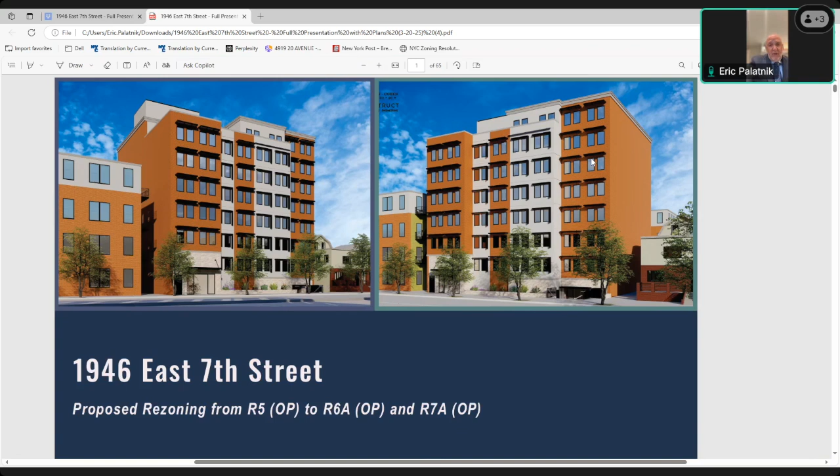Thank you very much. My name is Eric Palatnik, and I'm proud to be here today on behalf of Ahiezer Organization, which is presenting to you the proposal which is on the screen right now at 1946 East 7th Street, which is a proposed rezoning from R5 to an R6A, which is on the portion of the property you see right now, and the remainder of the block to be rezoned to an R7A. The request also seeks to remove the property from the Ocean Parkway subdistrict.

Project overview is provided here and gives you a fairly good description of what we're doing. On the left-hand side of the screen, at the lower left, you can see an image of 4-story brick multiple dwellings that were constructed in the 1920s, approximately 100 years ago. You see 2 sets of them, and then you see a single-family home.

The proposal in front of you that we're requesting to rezone, the area we seek to rezone, includes the brick buildings only. And the buildings that we seek to redevelop are the 2 brick buildings you see in the foreground, not the one in the rear. The home to the right is not included in the proposed rezoning.

The boundaries of the proposed rezoning are shown in the middle screen, shown with dots around it. The area in red is the area of the buildings that are going to be rezoned to R6A if the application is successful. And then we would construct the building that you see on the right.

This is described at the top there as a 7-story, 73-foot tall community facility and residential building, the most important part of which is providing fully affordable senior housing, 53 dwelling units, all of which will be 1-bedrooms, permanently affordable for seniors only at a 50% AMI. This building would be the continuation of an existing senior housing development that exists at the block.

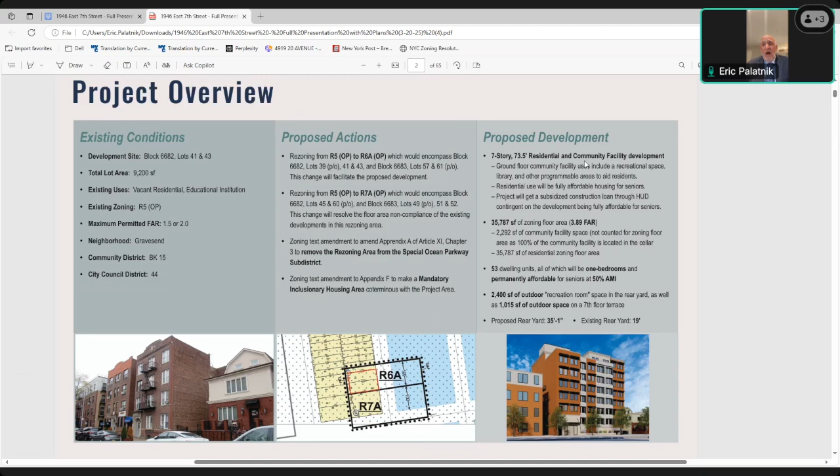It's being built fully with government money, taxpayer money, funded to fulfill a well-known, well-recognized need. There is no new senior affordable housing being built in this part of Brooklyn right now. So that's the request we have in front of you. Now this is the proposed request in a zoning map format. The left-hand side of the screen shows the existing zoning, and you see the dots in the middle.

It's an R5 OP district. We're asking to put in an R6A/R7A district - R6A on one portion, R7A on the second portion. We're not after the R7A portion of the zoning, that's not why we're here. We provided the R7A as a rationale for the zoning application that we make before you today.

There can be recommendations made to this application by the people reviewing it as we move ahead. If somebody should desire that the R7A be modified in any way, shape, or form, I don't think you'd find too much protest from the applicant, Ahiezer organization. But the R6A is the area that would enable the development of the 53 fully affordable senior units, which is why we're here today.

I'll show you pictures in a few minutes that show you that even though the map to the left shows an R5 district, there are buildings in this district that don't necessarily represent an R5 district.

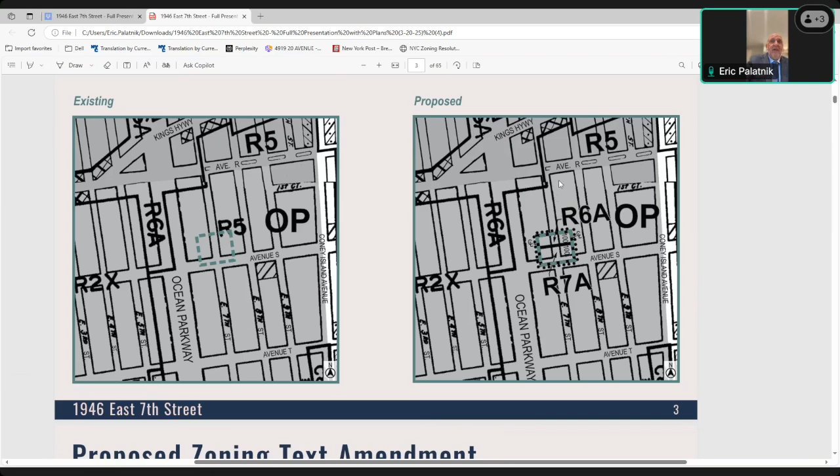Next slide I'll show you will be the Ocean Parkway sub-district. That's what we're seeking to remove the property from, the Special Ocean Parkway sub-district. The Special Ocean Parkway sub-district limits community facility developments and developments such as this specifically to a 1.5 FAR.

It was created, I believe, in the 70s - I could be off in my years - due to what people felt was a proliferation of community facility developments along Ocean Parkway and in the area, and people wanted to make sure that didn't continue. Well, that was in the 60s, or the 70s, or the 80s - I'm not quite sure which decade it was enacted in.

And now all those people are the very same people that probably live in the building to the left of us and are now well into their octogenarian years. The population has shifted in such a way, and the neighborhood has been so successful, and people have lived there their whole lives, and now they've aged, and there needs to be somewhere for them to live in the community so they can stay with their families and practice their religion and operate amongst people they grew up with.

And that is the idea of the congregation that's behind us - it's the idea of the congregation sponsoring the application. Although the senior housing will be available to people of all faiths, religions, colors, in full compliance with the Fair Housing Act.

Next slide shows you the different zoning designations. I think we know them, so I'll skip through so you don't waste your time. This shows you how the project has progressed through the years.

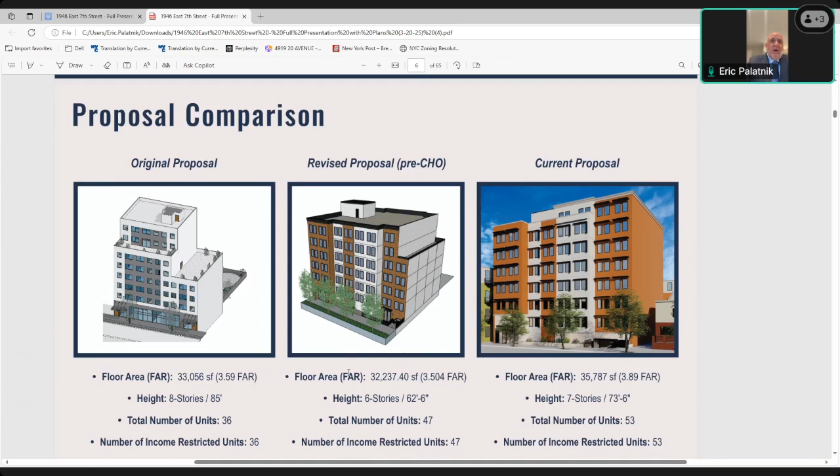While it's been undergoing review, its original proposal is shown on the left-hand side - that was an 8-story building. The 8-story building met with objection from the community. We met with the community and brought the building down, before City of Yes, to 6 stories. To be honest, we probably should have left it there at 6 stories.

But we're in a rezoning application - that's not our choice of what we leave it at. We're asking for zoning, and we have to depict to you what is allowed under the zoning. On the right-hand side shows you what's allowed under the zoning. City of Yes changed it from a 6-story building to a 7-story building and allowed us to achieve more FAR.

We've designed the building in such a way, as we started to do in the middle proposal, which was what was done in response when we were having some discussions with the community.

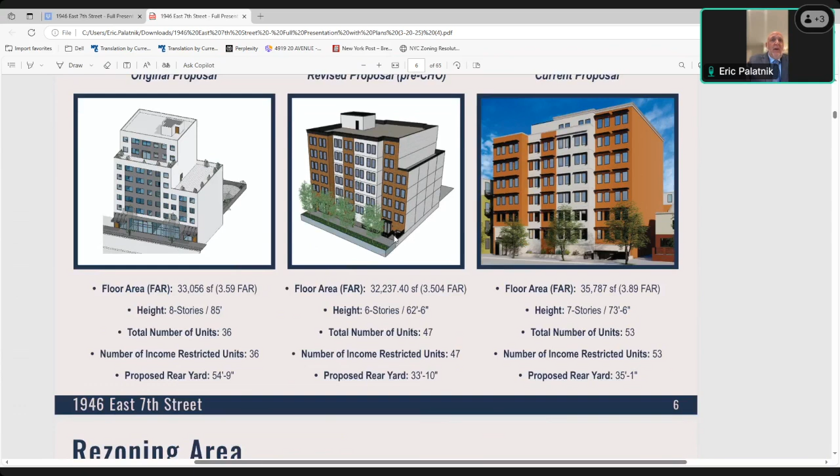We redesigned the building in the middle to have a larger rear yard, a 35-foot rear yard, much larger than is required. You'll also see setbacks at the first floor at the front, and nooks at the front. We'll show you that in more detail.

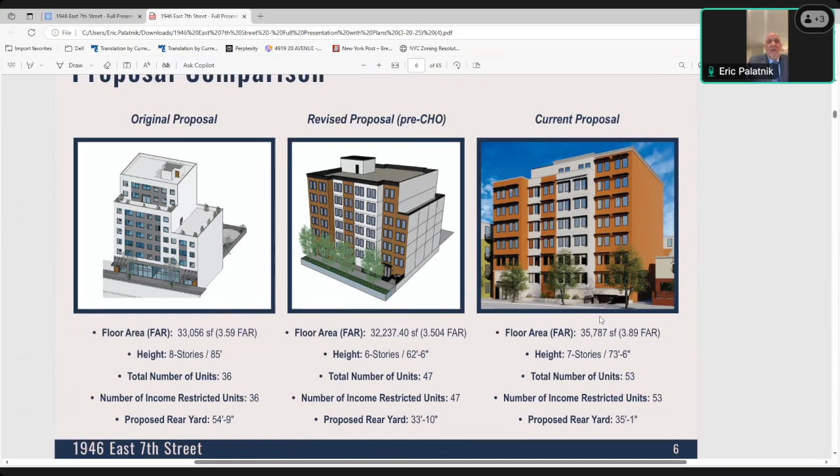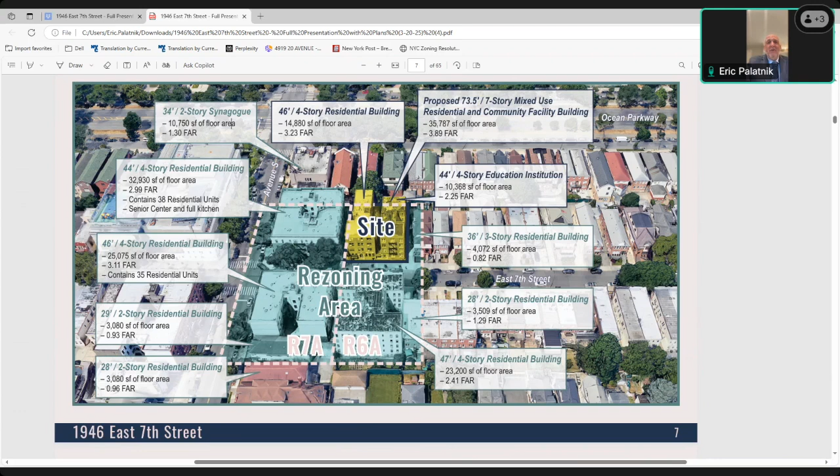We'll match in with the program of what's going on in the building to the left, where my cursor is, which is already existing fully senior affordable housing. And it'll match with the other buildings he has or owns across the street, which are rent stabilized buildings.

This is what I was trying to tell you. Look, there's three words they say in real estate: location, location, location. I wish I made that up, but it was said before I was born. We cannot move our location. We're here to ask to build a building to house seniors in a neighborhood, in a community, in an area, because it's there already. We can't move it.

It's like asking to put the Statue of Liberty over in Connecticut. It doesn't work. It's in New York Harbor. It has to be rebuilt, it gets rebuilt in New York Harbor.

So we're here to ask for your support, your resounding, hopefully, support for senior housing at the development site, which you can see is next to site number 4, the Sephardic Community Center. I don't need to tell anybody who lives in the neighborhood how important the Sephardic Community Center is to the community, as a centerpiece of both its past and its future, its youth and its seniors.

So you add the Sephardic Community Center, which has numerous social programs. You add the existing senior housing in building number 1, which has a cafeteria and a food program. And you add the fact that building number 5, if approved, would have within it further community facility uses to support the campus environment, as well as 53 fully affordable senior units. I think people can understand why the request we're making is a reasonable one.

The rent that would be proposed, this would be the rent. So it's not rocket science. It's a program run according to a computer program, and this is the rent, and I think you'll be happy. And as I said, this is open to the entire community.

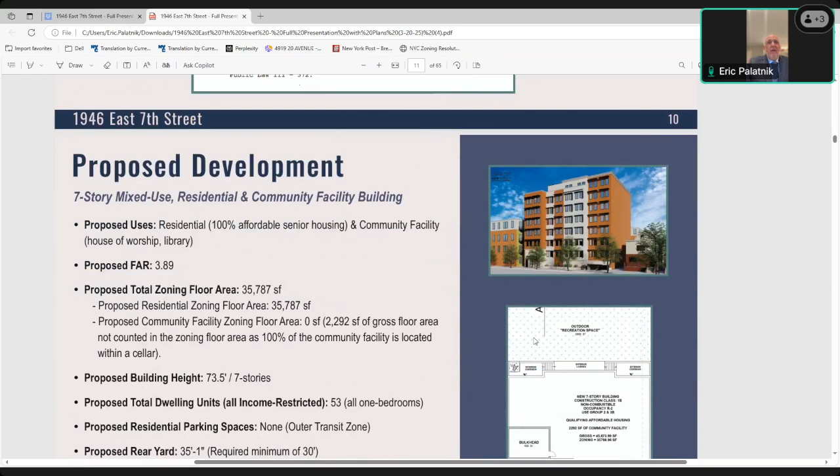Excuse me, I apologize. All the different attributes, I'm not gonna go through too much of this stuff here, but you can start to see at the bottom, there's the front of the building, how it nooks around, and there are playful areas there, as architects say, and you'll see setbacks. You can see a line on the right-hand side.

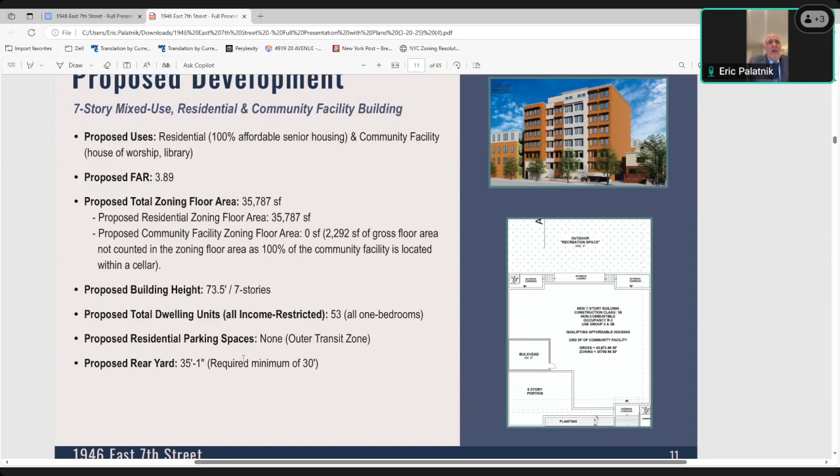It's a step down adjacent to the building next to us. And you can see the rear yard, which is substantial. I said before, I think we're at 35 feet - I have to double check that. But much larger, yeah, 35 feet, required 30 feet. So much better than what's there right now.

Now I'm going to show you the heights of buildings that are around us, because we're asking to be 73 feet tall. East 7th Street has a thing to it.

It's not entirely low-rise residential. And I'm not suggesting that people's lives should be intruded upon by this building just for the sake of somebody making a buck. That's not the case here. We're trying to do something good for the community that has to be here.

And I'm trying to show that other buildings in the area do exist along East 7th Street as you move up and down it, including to the left of us and the right of us, that are a little bit larger than what's allowed. And many of those buildings predate the zoning.

Show you here the context of the area. We're proposing to be 73 feet. Like I said, we should have stopped at the 6th story, so maybe a little bit less.

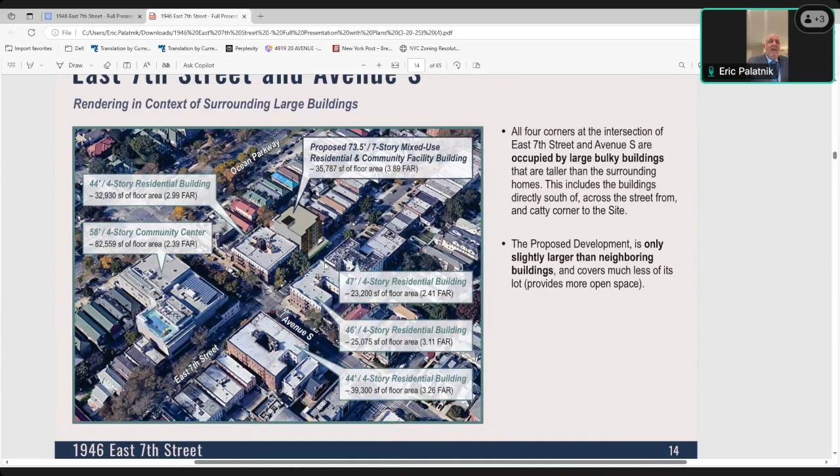But the Sephardic Community Center building is 58 feet tall. The other buildings across the street from us are 47 feet tall. So you're not talking about a substantial difference between the heights, a recognizable difference, necessarily, if the building were to be just a little bit smaller, and it could still meet the needs.

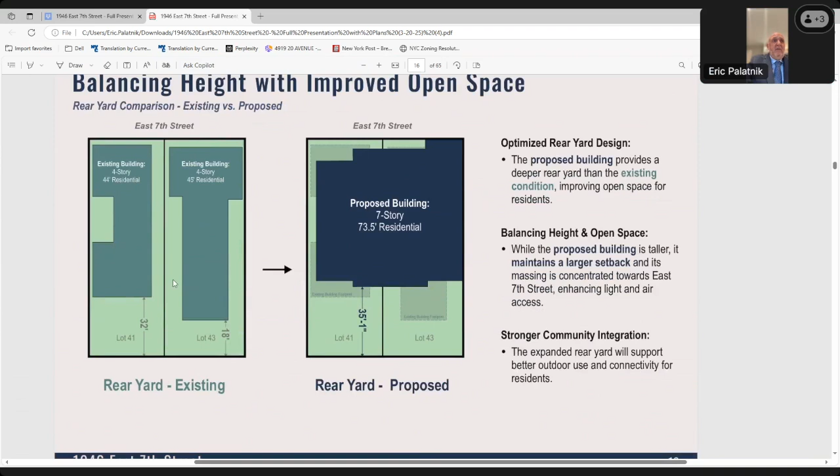Having said that, you can see here, a block away from us, how tall the buildings are. This is the proposal compared to what's to the left of us and what's on the right. This is everything I just spoke about.

We've all just spoken, I just explained all this to you, so I'll go through here. I mean, this, if nothing else makes sense, at least this may.

So despite the fact that this community is supportive of creating housing in all types, which I see when I go to the community board - they are incredibly supportive of creating housing - despite everybody's best intentions, they are very far behind and have a lot of burden to make up for.

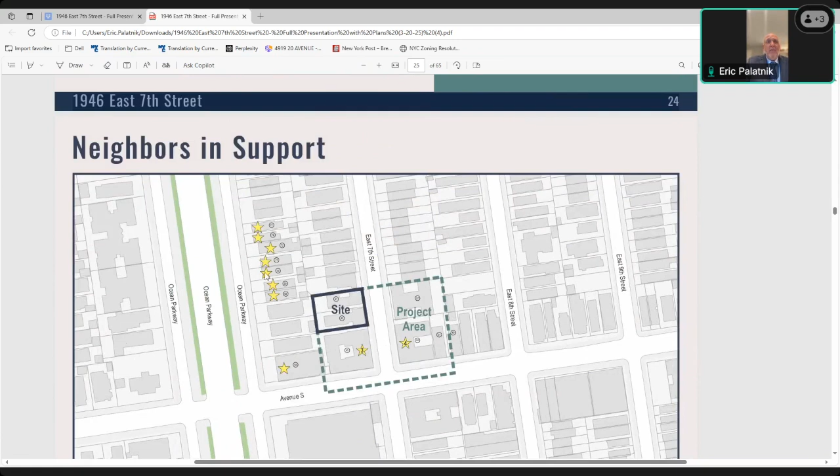I know the building's taller than people want it to be. This slide shows that we've tried to amend it to the best of our ability, and it was very controversial at the community board. We changed it and cut out people who indicated they're no longer in support of it, that we know of. There may be more people not in support, but it's meant to show you people that were in support, or that we believe to be in support. We don't mean to misrepresent — if somebody is here to tell me that any of the people shown are not in support, let us know.

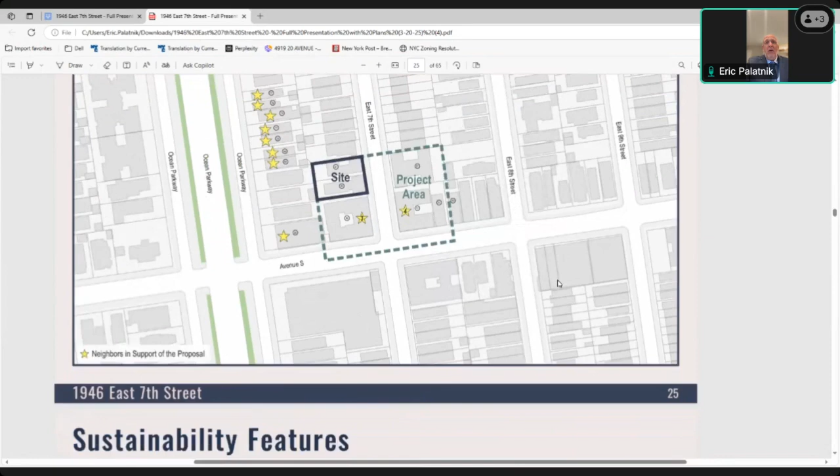The building itself, as far as a non-program related item, will have all sorts of sustainability features. It will have green features, as you see here. It will also be built utilizing locally sourced businesses as much as possible, as well as offering work in accordance not just with the city's requirements, but HUD requirements, to minority and women-owned business enterprises.

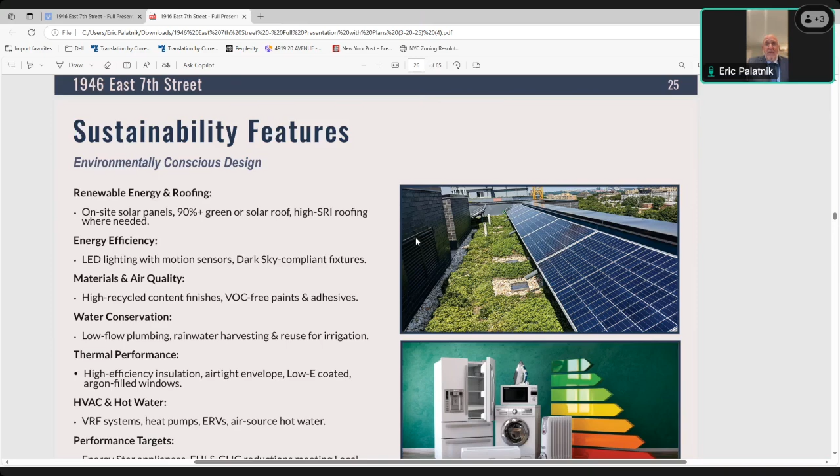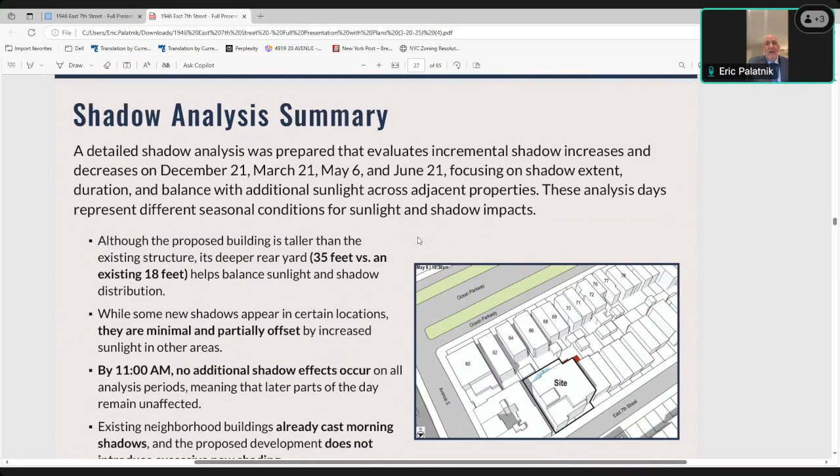We've done a shadow analysis of the buildings, even though we're not required to. It went through an environmental assessment statement. During that analysis and the city's environmental quality review analysis, it was found to have no substantial impact. But we know the community wants to understand the shadow impacts, so we did a detailed analysis.

It details the incremental shadow increases and decreases on December 21st, March 21st, May 6th, and June 21st, focusing on the shadow extent during those days. As you can see, by the third dot down, by 11 a.m. there are no shadow effects occurring during the analysis period, so it's unaffected in later parts of the day. There are shadows in certain locations, but it's offset by sunlight and not that substantial.

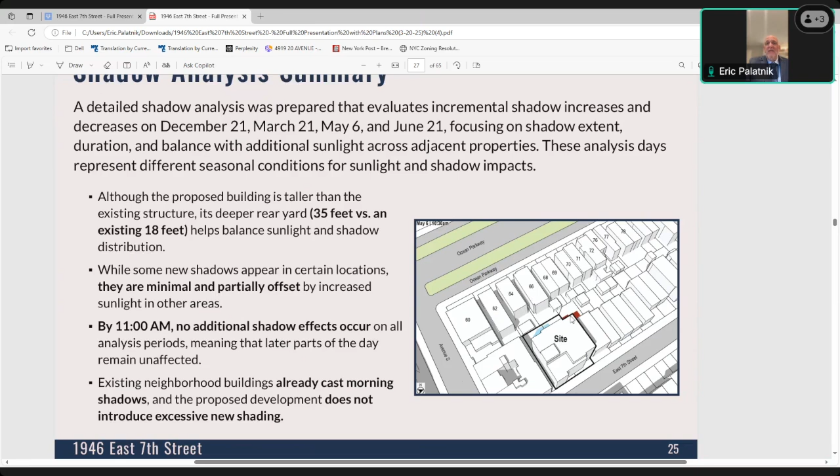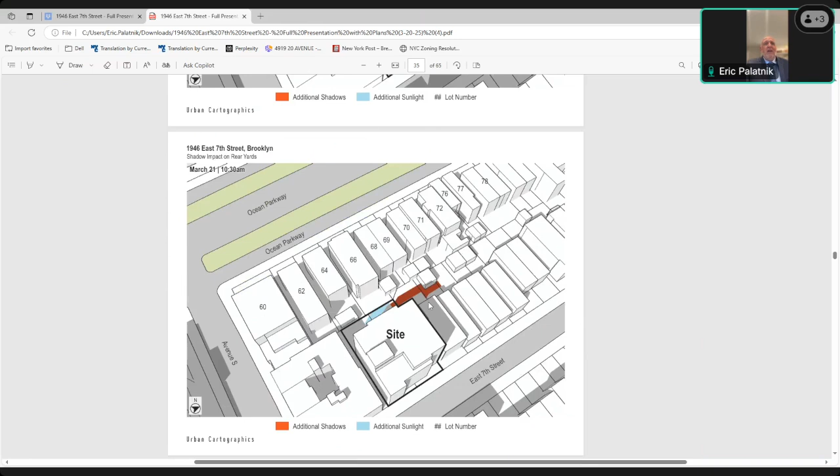We're going to show you a couple of different slides here. You can see the shadow analysis on December 21st at 8:51 a.m. By 10 a.m., it starts to lighten up, and by 11 a.m. it lightens even further. On March 21st, you see similar patterns throughout the day, and as the days get more into summertime, they get more light, obviously. So by March 21st at 10 in the morning, everything is out, and on May 6th at 6:30 in the morning, you already have sunshine.

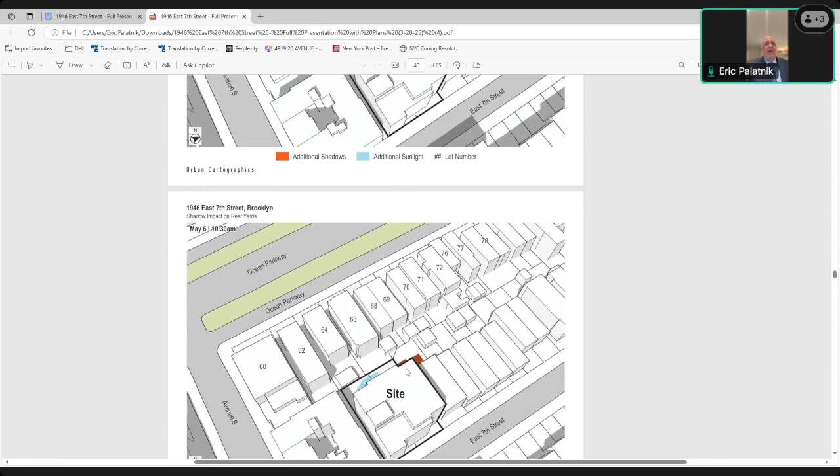You have shadows. But by May 6th at 8:30 in the morning, the shadows start to lift. And by the time you get to 9:30 in the morning, the shadows are removed from the properties behind us. And you have similar patterns as you move around through the month.

June 21st, you have the same situation. June 7th, June 21st at 7 a.m., you have more shadows. Same condition at 8 a.m. And they start to lighten up as you get to 9 a.m., and they're gone by 10 a.m.

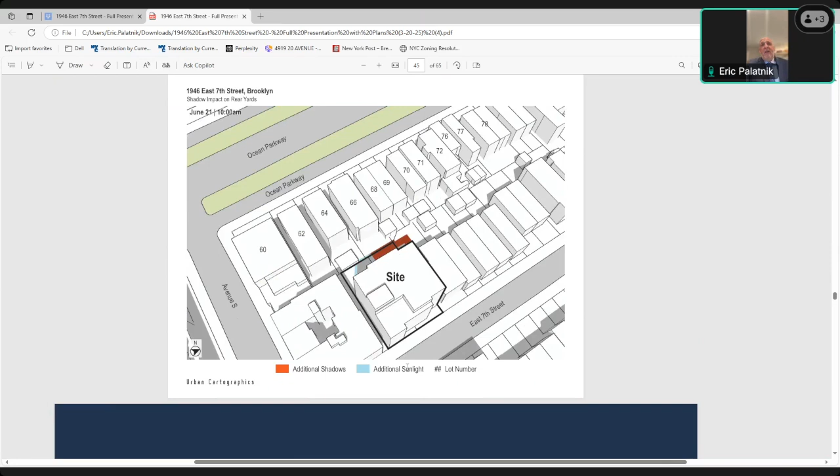So we're not here to tell you that the buildings won't have any shadow impact at all, but we are here to tell you that the shadow impacts are negligible and they'll be offset by the uses that are going on within the building. The proposed plans are shown here.

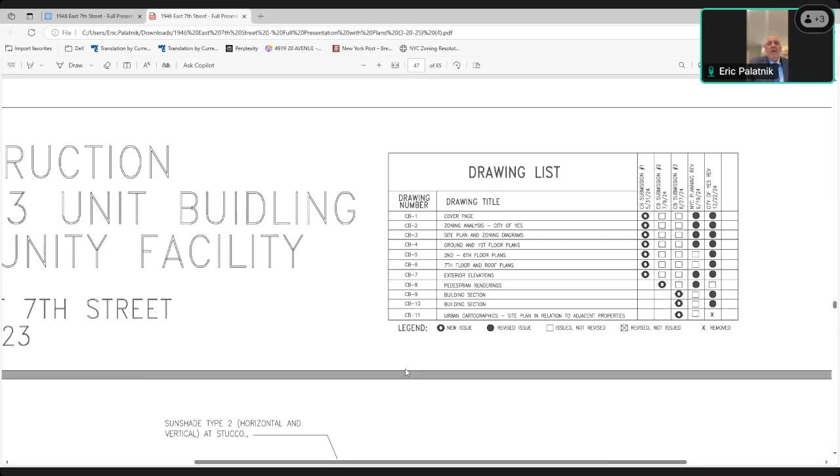That concludes my presentation. I'd be happy to answer any questions you may have. And thank you for your time.

Thank you for your presentation. We do have a number of questions for you. One of the first is, has this project always been anticipated for senior housing?

It appears in your first proposal of the building that the unit sizes would have been larger, because it was around the same square footage for the project. Could you talk about at what point the building decided to be moving forward as a 100% senior affordable housing project?

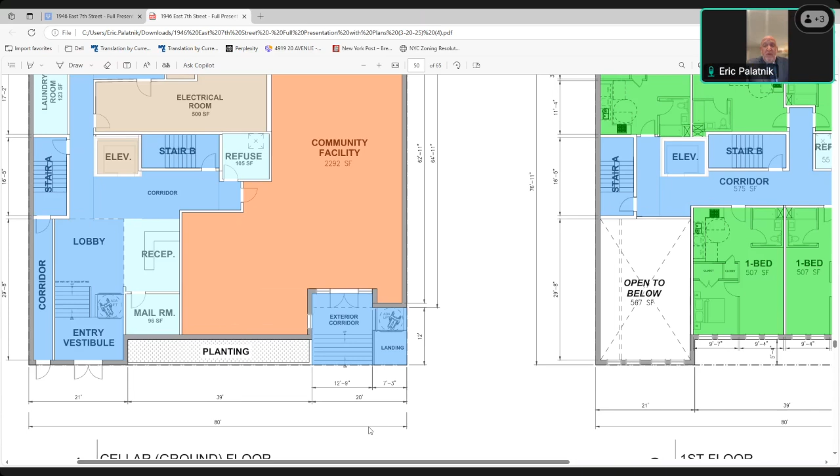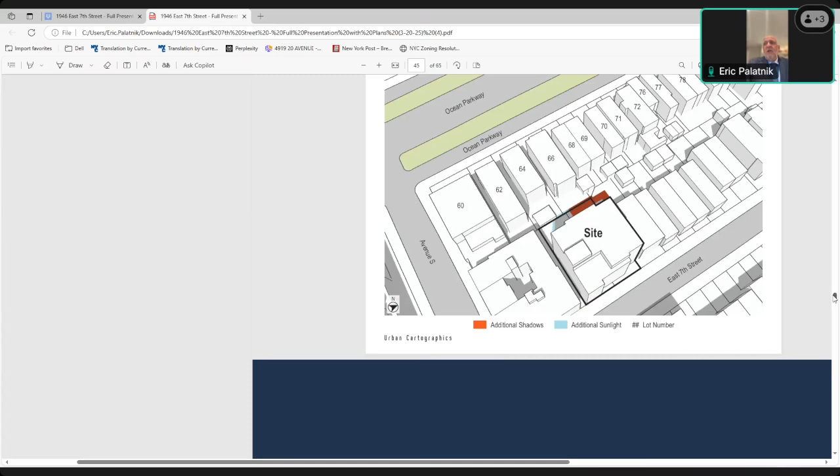I was always proposed to be a fully senior affordable project, as I showed you the HUD letter a few moments ago that's sponsoring the application. There was never anything under. We did switch architects during the process because we realized the unit designs were not meeting the needs of what we wanted to see as far as fully affordable. So maybe that's what you're recognizing, but it was always proposed to be a fully affordable senior housing development.

And then in terms of the non-conforming use, is R7 required for that building to be in compliance? For the non-conforming, for which building are you talking about? For the existing buildings? Being proposed to be rezoned to R7A.

No, it does not necessarily bring them into compliance. I think R6A would probably bring those buildings into compliance just as well. If those—I believe what you're talking about are—let's get to the map here so I can make sure. These buildings right here. That's correct. Yeah, I believe I'm eyeballing it, but I believe R6A would accommodate them at all.

But these buildings, again, this is what I was trying to enunciate or make clear, were not the driving force behind this rezoning. Although they would benefit by becoming legal and maybe even have the chance to enlarge. I think that's what concerns some people, is the potential for them to enlarge under the rezoning, but there is no plan by AHI as an organization for these buildings to be enlarged.

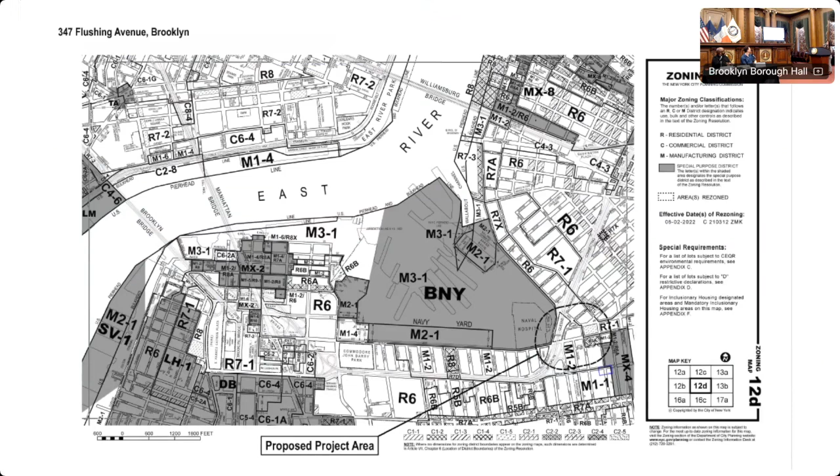The zoning map shows the site, existing M1-2. The tax map shows a little bit more clearly the boundary of the rezoning area. Again, the M1-5 on the entirety of 347 Flushing, and the R7-1 with commercial overlay on the condo lot at the corner.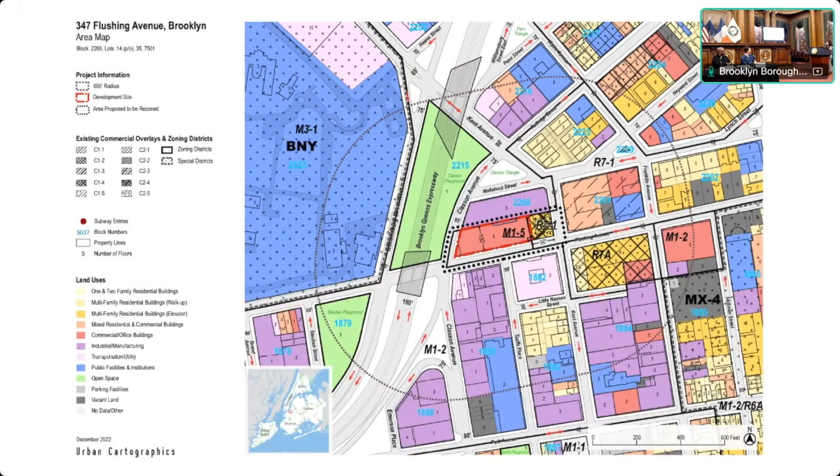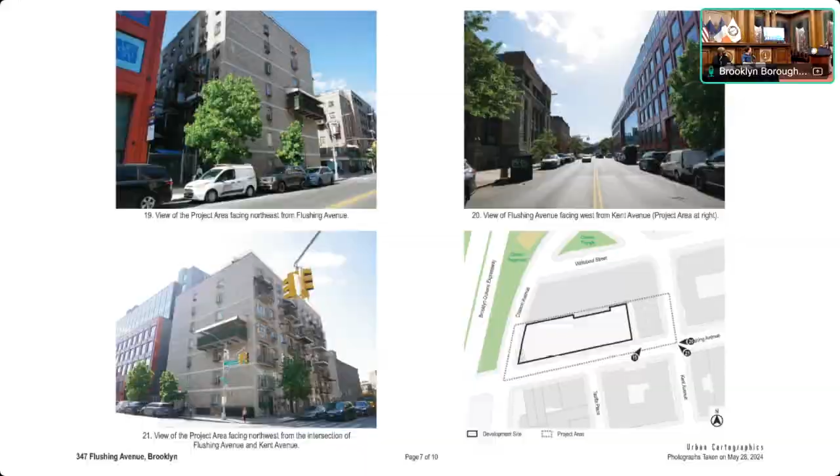A few more photos of the street conditions. There's a condo building on the corner. And here are just some renderings of the entire facade.

Following are the architectural plans. We can go through them if you have any questions, but that's really the crux of the proposal, and we're here to answer any questions.